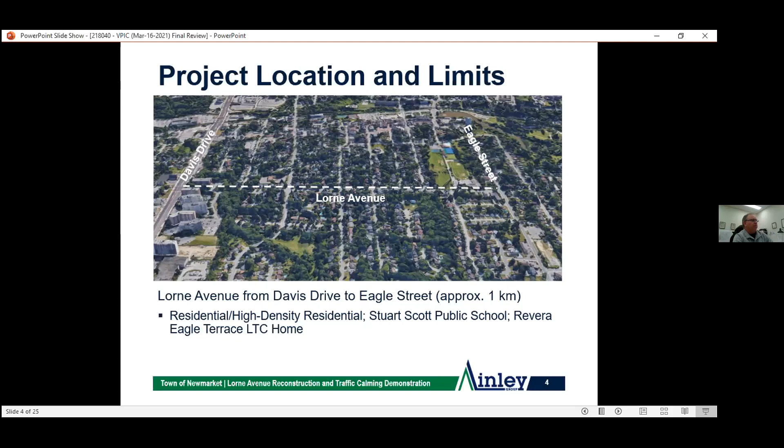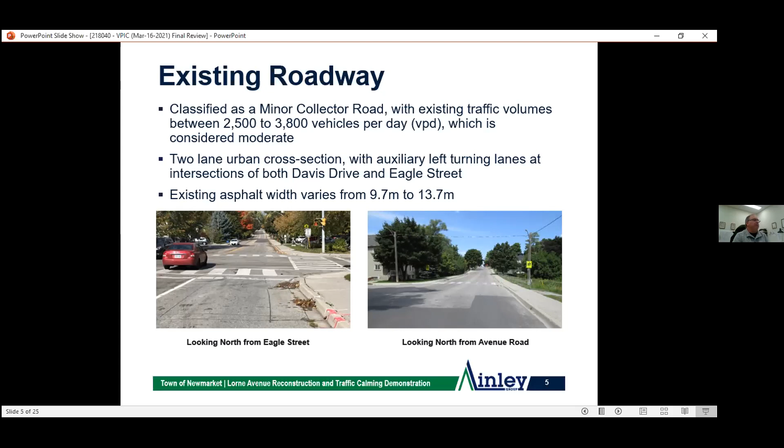The road is currently classified as a minor collector road with existing traffic volumes between 2,500 and 3,800 vehicles per day. This is typically considered moderate traffic volume. It's currently a 2-lane urban cross section with auxiliary left turn lanes at both the intersections of Davis Drive and Eagle Street for left turning movements, and both of those intersections are signalized. The existing asphalt width throughout this stretch of road varies quite a bit, from 9.7 meters to 13.7 meters.

Sidewalk is continuous on the east side of Lorne, with a lot of sections that are not compliant with the Accessibility for Ontarians with Disabilities Act, AODA. You'll see that again later in the presentation. Currently, AODA requires all sidewalk to be a minimum 1.5 meters in width, and there are a lot of areas where that isn't the case here. The old Newmarket standard was, I believe, 1.35 meters.

On the west side of the road, there's currently sidewalk throughout, with the exception of the section between Millard Avenue and Calgain Road, where there is no sidewalk. Right now, there are dedicated bike lanes on both sides between Millard and Park Avenue. This was completed as part of the town's East-West Bikeway project in 2017.

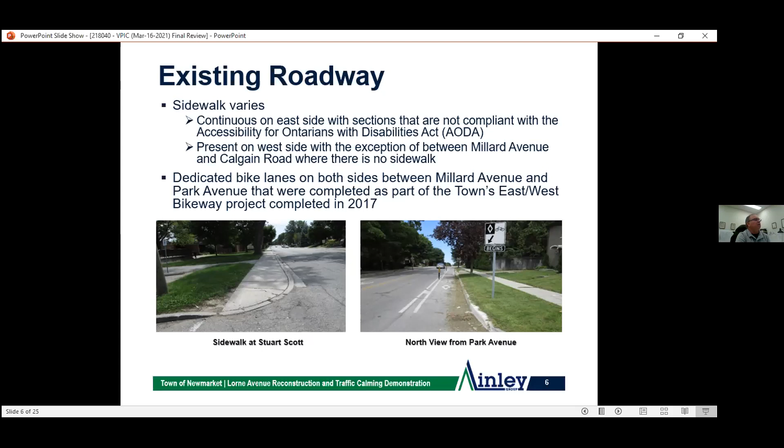York Region currently runs a school route between Davis Drive and Eagle Street. There's a number of bus stops along the way. It runs buses in the mornings and late afternoons. So it's not a regular transit route, but it is a school route that York Region runs, and that will be maintained. On-street parking currently varies throughout, but it's primarily located on the west side where permitted. And as mentioned earlier, Stuart Scott Elementary School is located just north of Eagle Street.

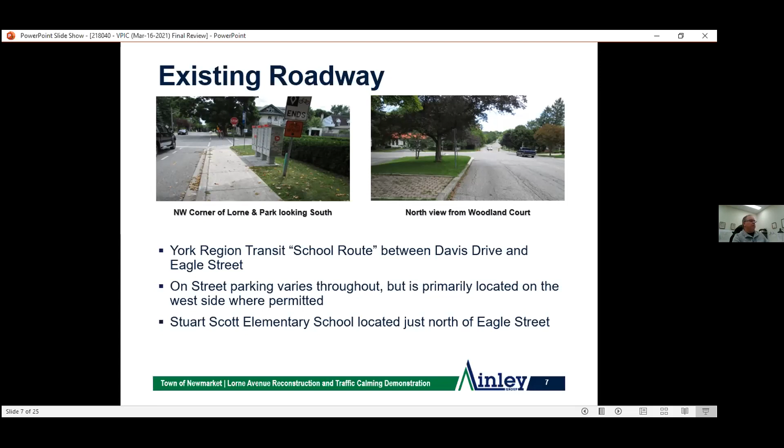So our project objectives: one of the big ones on this project is infrastructure renewal. The existing infrastructure for this area was constructed between 1963 and 1974. So it's 47 to 58 years old, and it's exceeded its life expectancy. The sanitary and storm sewers are in poor condition. The town has cameraed the sewer pipes. There are a lot of failing pipes, damaged pipes that are in need of repair. And there are sections that require upsizing per the town's water/wastewater master plan.

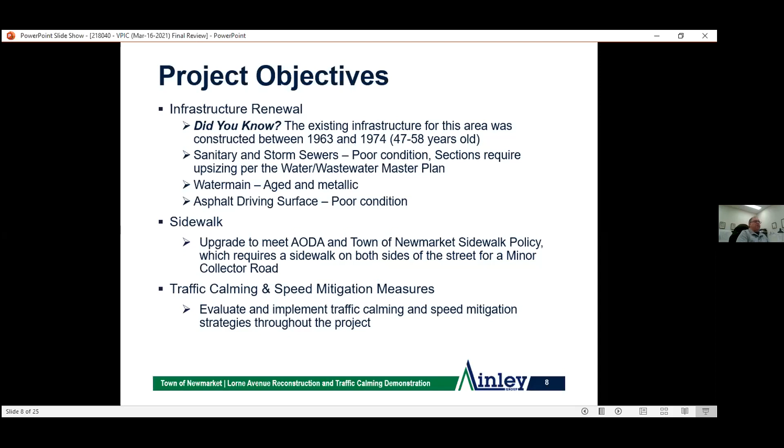The existing water main is aged and it is metallic, and the town has had some break issues on this road. So it is also in need of being replaced. And the asphalt driving surface, which I'm sure everyone sees and is aware of, is in poor condition. The sidewalk needs to be upgraded to meet AODA requirements and the Town of Newmarket sidewalk policy, which for this class of road requires a sidewalk on both sides of the street. Traffic calming and speed mitigation measures have been evaluated, and some traffic calming and speed mitigation strategies will be implemented throughout the project.

Active transportation. The town's active transportation plan was adopted in 2018, and it recommends dedicated bike lanes between Davis Drive and Eagle Street. So part of this project was to incorporate those recommendations. Based on discussion with town staff and comments received from residents from previous consultations, there were 5 different alternatives that were considered, reviewed and evaluated for the proposed cross-section in order to meet all the needs that needed to be achieved here.

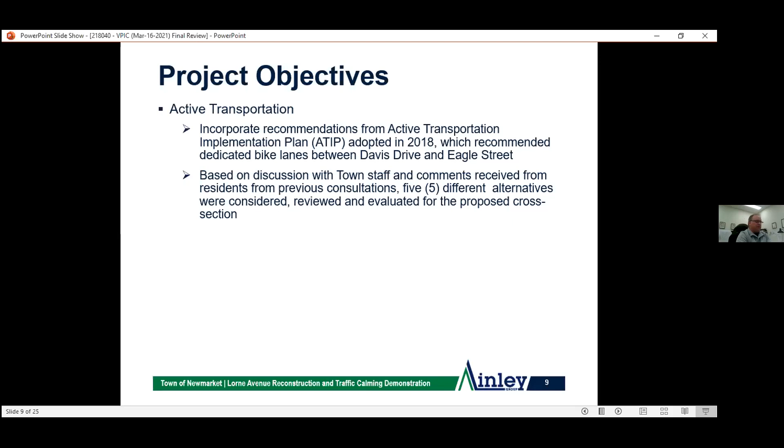So we'll get into the planned improvements now. We've got a bit of the background and why this needs to be done. So the proposed improvements: all new underground infrastructure, sanitary sewer, storm sewer, water main, including services up to property line. A 2-lane urban cross-section, so it's a lane of traffic in each direction. New sidewalk on both sides of the street that will be AODA compliant and meet the town's sidewalk policy for a minor collector road. Dedicated bike lanes in each direction to meet the town's active transportation implementation plan.

Stormwater management and incorporation of low impact development, or LID, features for improved water quality and reduced peak flows during minor storm events. Traffic calming and speed mitigation measures, new mailbox pads, bus stops, and park benches. These have all been incorporated into the design.

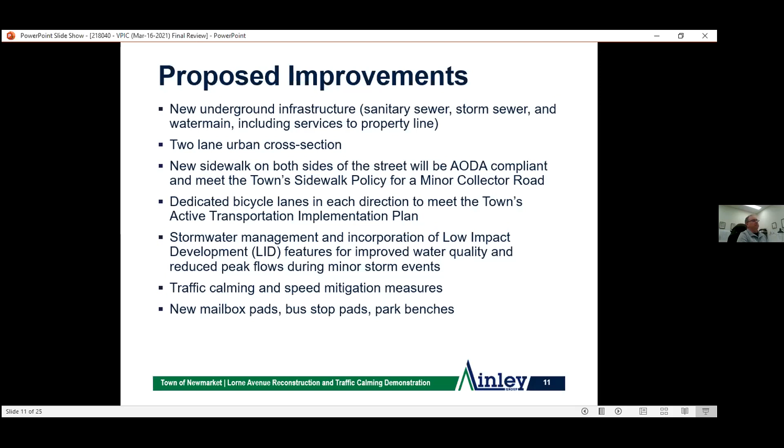So this is a look at what the preferred alternative typical cross-section will be throughout. As I mentioned earlier, the existing asphalt width on Lorne Avenue varies from 9.7 meters to 13.7 meters. Most of the wider asphalt is north of Millard Avenue, where there's a wider right-of-way. So we're implementing an asphalt width that's 9.7 meters wide, 2 lanes of traffic, bike lanes in each direction, and sidewalk on both sides of the road.

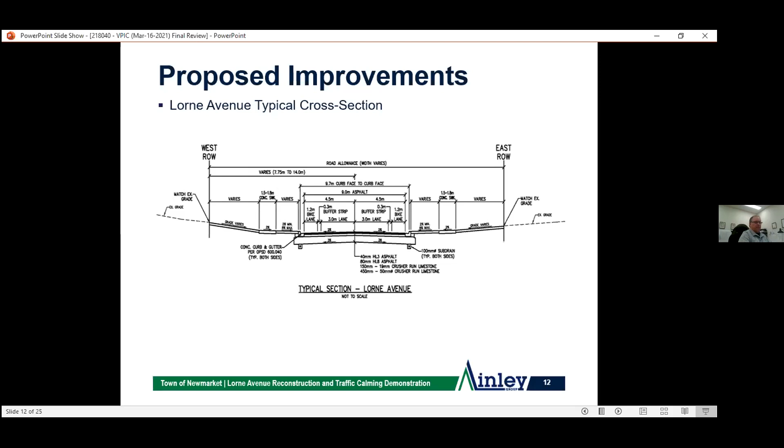This is just an example I'll go through here of a low impact development feature. Some of you may have seen these throughout Newmarket. And just an FYI, the Town of Newmarket is recognized as a leader in promoting LIDs on their capital projects. We've been implementing them for a number of years now. There are some down on Forest Glen Road. Queen Street has some. Various options have been put in over the years.

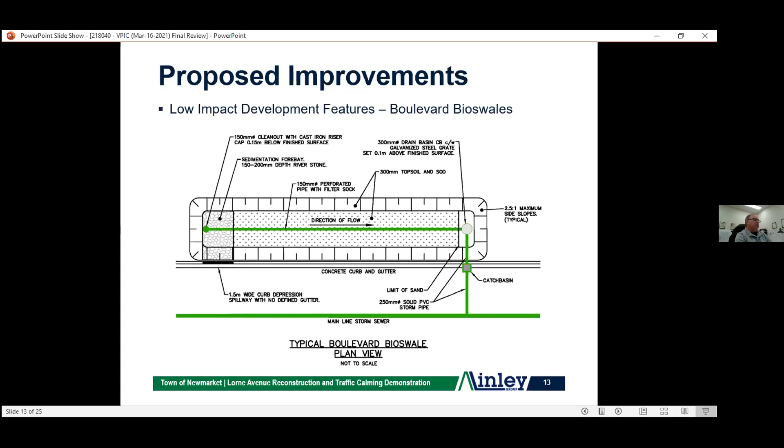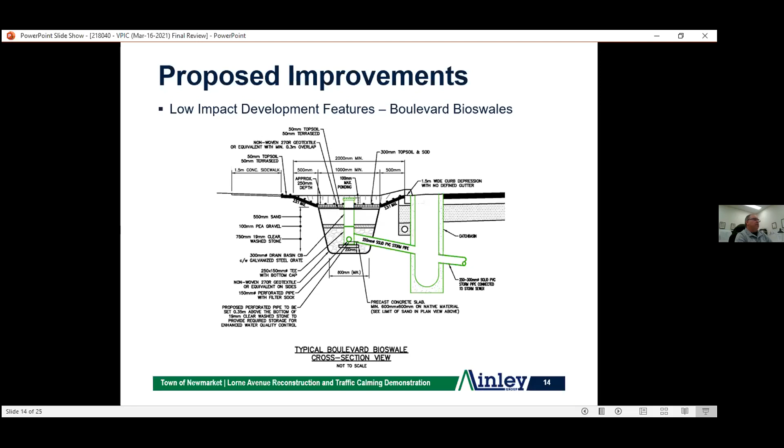This is a bioswale, so it's just a low depressed grass area just off the road. It collects the water, runs it through this filtration media, and then into the storm sewer as clean water before it goes out to the downstream watercourse. Another feature we're looking at implementing on this project is tree cells. So they act similar to the bioswales, but they would go in along the road and clean the water before it outlets to the storm sewer. Again, there's filter media that goes in there. It's pretty straightforward, and it's a real benefit to the environment.

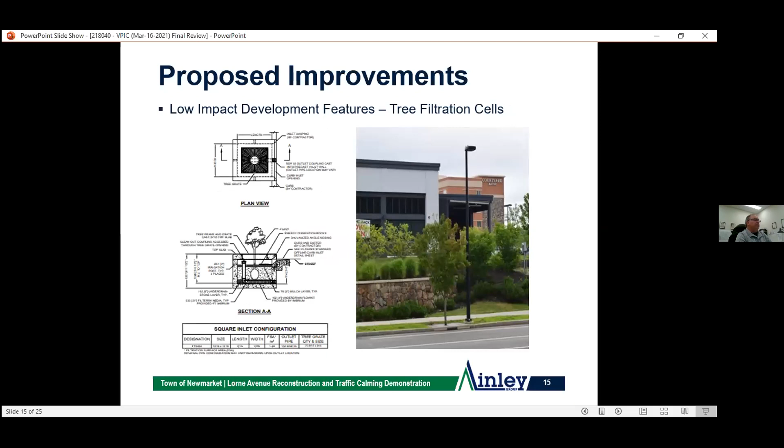Traffic calming and speed mitigation features. So we'll go through a bit on the road geometry here. Again, the asphalt width. So we do have a reduction between Millard and Calgain Road, which will be about 4 meters of asphalt, which is significant added green space, the boulevard area. So that'll be a big improvement. The asphalt width from Eagle Street to Millard is currently 9.7 meters. That will be maintained.

Travel lanes are reduced to 3 meters. So the current lane widths throughout, they vary all over the place, but they're in excess of 4 meters in a lot of places. So they're not really defined travel lanes for cars.

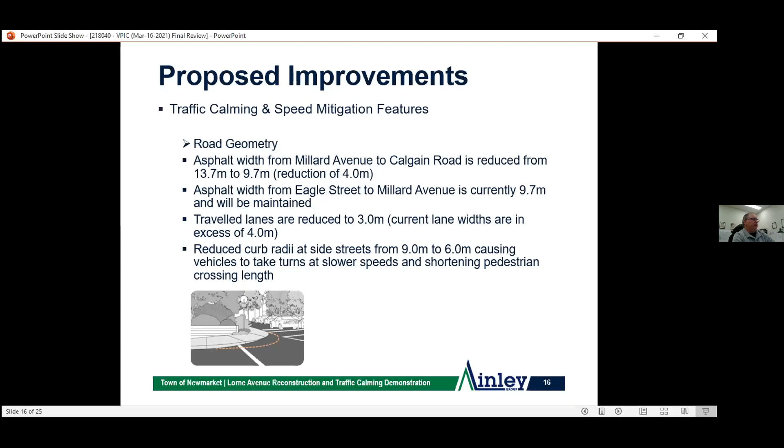One of the things we've done on the side streets, the intersecting streets, is reduced curb radii at the side streets. The standard is usually a 9-meter radii, and we've reduced it down to 6 meters. You can see in the illustration below, that yellow line shows what a reduced radii will do there, as it'll cause vehicles to take the turns slower, and it also shortens the pedestrian crossing length when you're trying to cross the street.

Traffic calming, speed mitigation features, automated speed and volume measurement devices. So the town will be looking at implementing some technical devices at various locations. And these will be used to monitor the speed of traffic, also cyclists, pedestrian counts, and have the ability to transfer data directly to a remote server that the town can then use to monitor the data.

And also the town will be looking at possibly implementing some solar powered speed boards that could be added in the vicinity of the school. Everyone's seen these. I believe the town has a plan where they move them around from time to time. So one could be implemented down by the school.

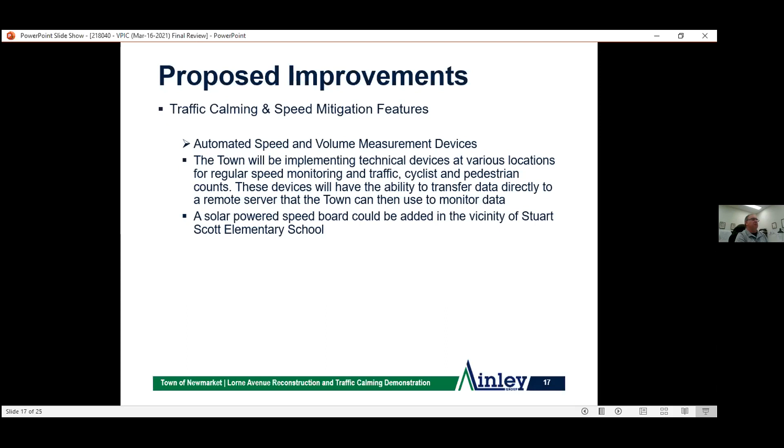Raised intersections. We are proposing some raised intersections at Queen Street, Millard Avenue, and Park Avenue. These 3 intersections are all 4-way stop controlled. So traffic does have to stop before they enter the raised portion, and then they will come off the raised portion at a slow speed. There'll also be salmon colored concrete for increased visibility. The raised portion is only 8 centimeters, so it's not a significant amount, but it is enough to cause vehicles to slow down.

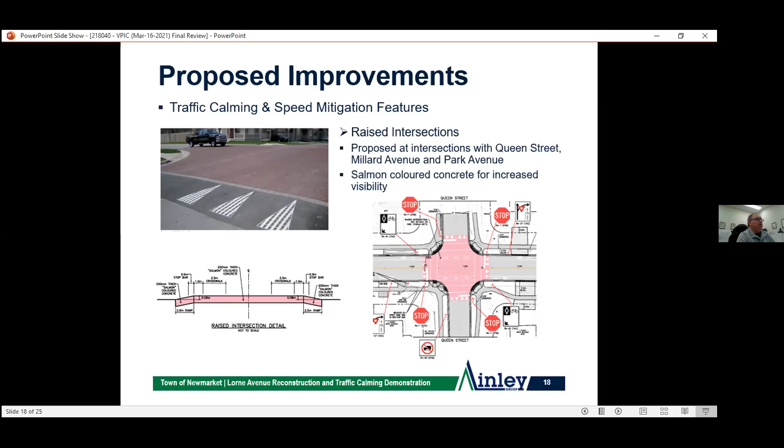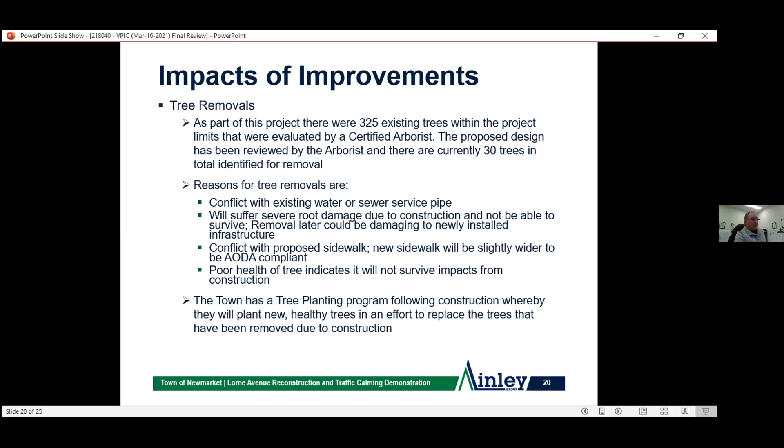Conflicts with proposed sidewalk. The new sidewalk, as I mentioned earlier, needs to be AODA compliant, and some of the tree roots will be in close proximity, so they will be removed to accommodate. And there's a few circumstances where the poor health of the tree indicates it will not survive the impacts from construction. The town does have a tree planting program following construction whereby they will plant new healthy trees in an effort to replace the trees that have been removed. And also, as I mentioned earlier, we're trying to implement some tree cells, so there will be some added trees that way as well.

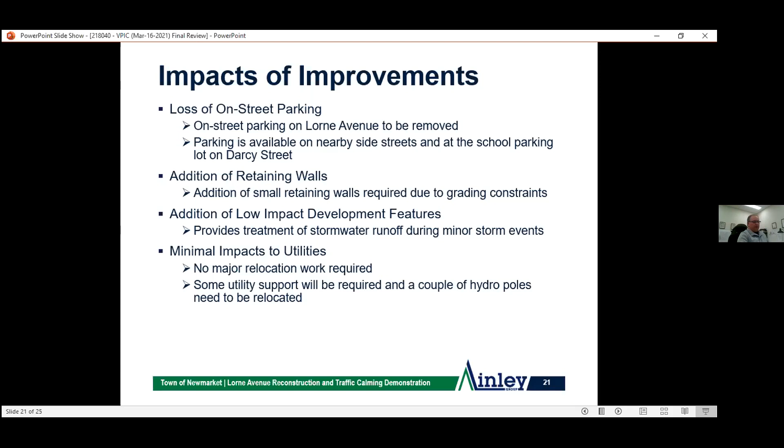This proposed option has minimal impacts to existing utilities. That would be your gas mains, your Bell structures, your Rogers cable. So there's no major relocation work required for this project based on the current design. There will be some effort to work around some existing utilities, but it can be done. There are a couple of hydro poles that need to be relocated, but nothing significant.

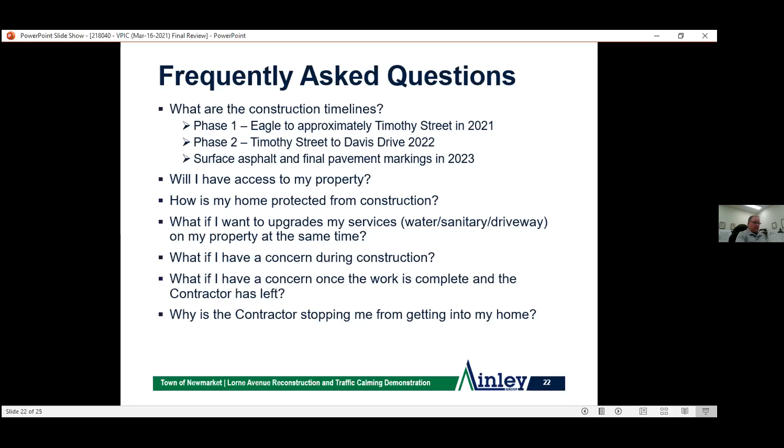Follow them, obey them, be polite to them. They're just trying to do their job. So if you can, just be patient. It may take you a few extra minutes, but they are just trying to protect everybody out there. So I try and always say, please be patient and be kind. So next steps.

Next steps is, well, once we get through this, the town and myself will go through all the comments received following this public information center. We'll get responses out, address them, and then finalize the tender package. Then the town will go through their tendering and award process, and award the contract to the selected contractor.

One of the opportunities, and this is another thing that the Town of Newmarket does very well that I've seen over the years, is they have the volunteers for the resident ambassador program. It gives the residents an opportunity to be involved in the job. We'll have meetings every 2 weeks. If you're part of the ambassador program, we will have a meeting before our regular site meetings where we discuss the issues.

A lot of times you'll see contractors standing around. You think nothing's going on. There's probably something going on that they need to deal with that's taking a little bit longer. So you'll hear about that stuff. You'll hear if they're on schedule, if they're not on schedule, why aren't they on schedule? We also listen to all your concerns, issues, if you've been talking to your neighbors, and we take all that into consideration. So we do everything we can to try and keep residents involved and informed.